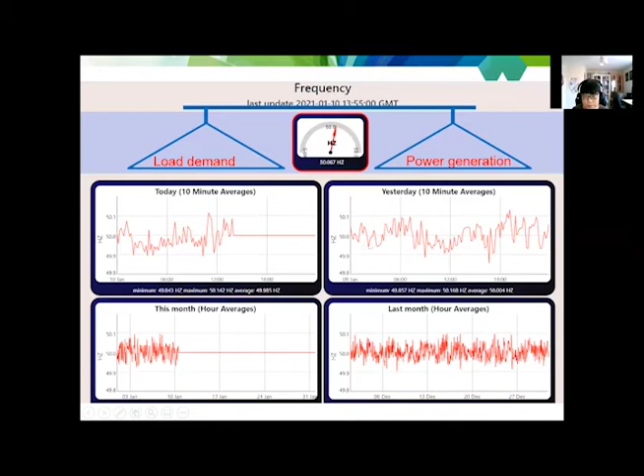Certainly we can see energy storage also starting to play a role in this particular plan. For 7th January this year, that day cost £8.2 million. So it really comes down to cost.

From estimation, around £2 billion is needed just to try to maintain the grid balance. For example, if we forecast the generation and it's away from the real generation, you have to pay a high price to buy peak time generation, to pay a very high value to buy extra generation on board. And if sometimes you generate too much, you have to pay money to the generator to not generate - that's where all the cost comes from.

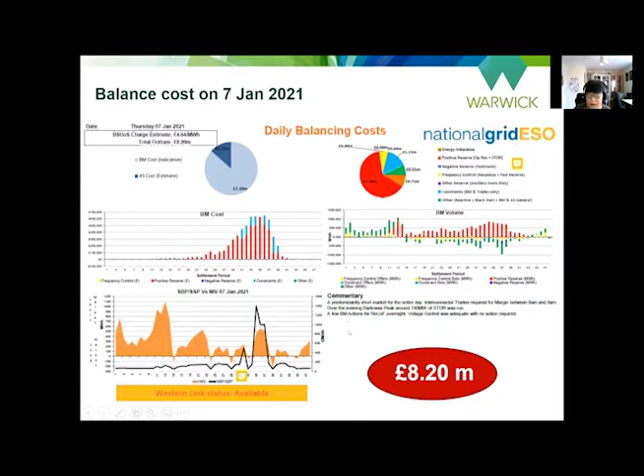This is why in recent years, energy storage has become more and more valuable and is becoming a very hot topic, apart from transportation and portable devices. There's also grid storage in the power sector.

From the power sector's perspective, to balance demand and generation and increase grid flexibility, energy storage plays a role either on the user side, to regulate demand and save money and help with grid balance, or on the generation side, to regulate their generation and try to get closer to the demand side, reducing their cost and also delaying investment on new or enhanced infrastructure.

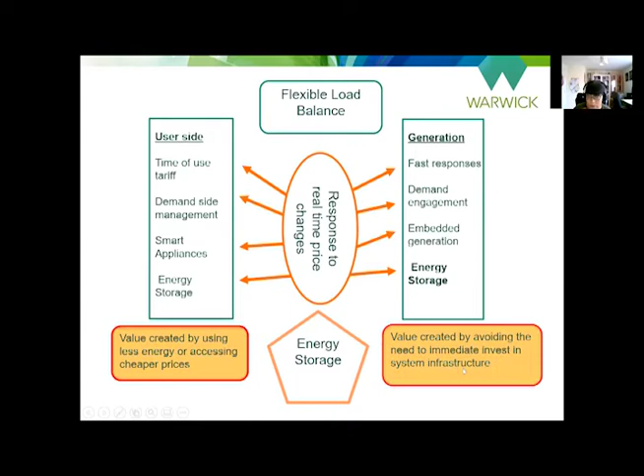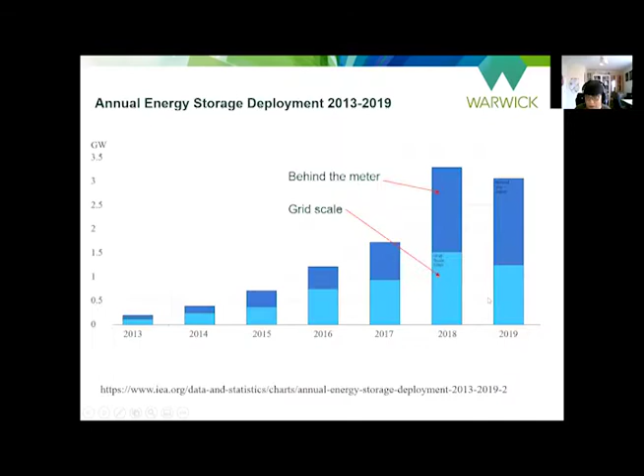There's also an annual increase in energy storage, either on the generation or grid side, and also behind the meter - meaning normally on the distribution or user side. So both sides are growing annually, trying to catch up and get into this market, catching up revenues.

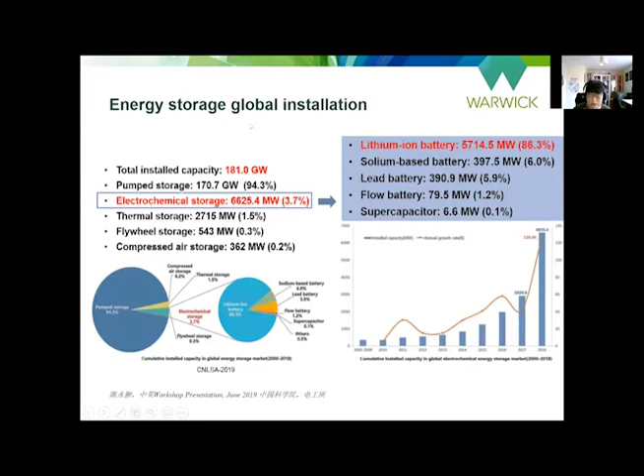Globally, energy storage installation until 2019 has reached a certain amount. Among all installed energy storage for grid service, lithium-ion battery is probably the dominant one - around the world it's dominant, in China it's dominant, and in the UK it's also dominant. We often see news about storage projects just starting, getting funded, or getting investment. Anyway, in the UK and around the world, energy storage installation has increased rapidly.

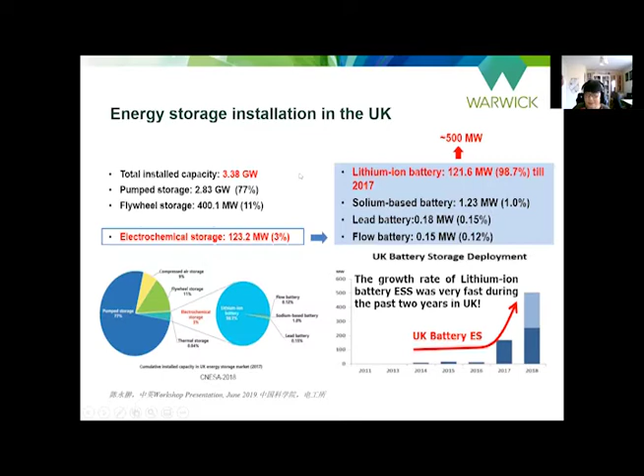But when we look at installations in recent years of energy storage, we can say that most of this, mostly commercial projects, are batteries. So definitely batteries have been the winner in recent years.

However, if we come to the net zero emission target, if renewable energy increases to 50, 60, 70, 80%, then what's going to happen if that's not enough?

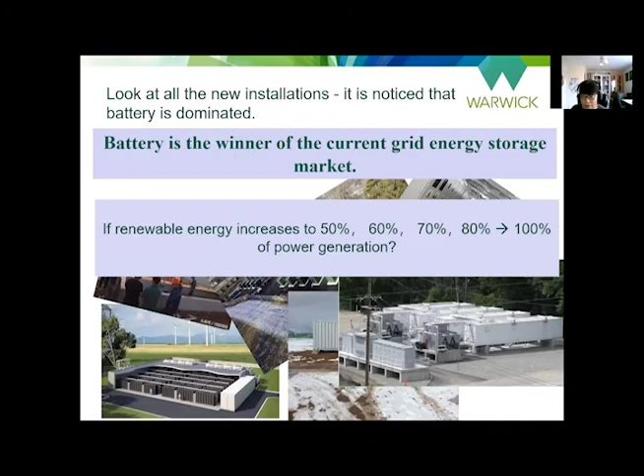It's not just about technology, it's actually about cost. If we look at battery in the energy storage market for grid balance, they really catch up in the high value market for grid balance - for example frequency response is worth quite a lot of money. But if you put into such large capacity, long-term capacity storage, the market value currently is much, much lower than those high frequency ones.

So even if they have the technology and can install massive batteries into such a space, able to store a couple of days or a few days at larger scale to power 50% of a national need, probably the battery wouldn't have the market position like today in the high-end value frequency response sectors. So in that case, we need to look at long-term storage technology.

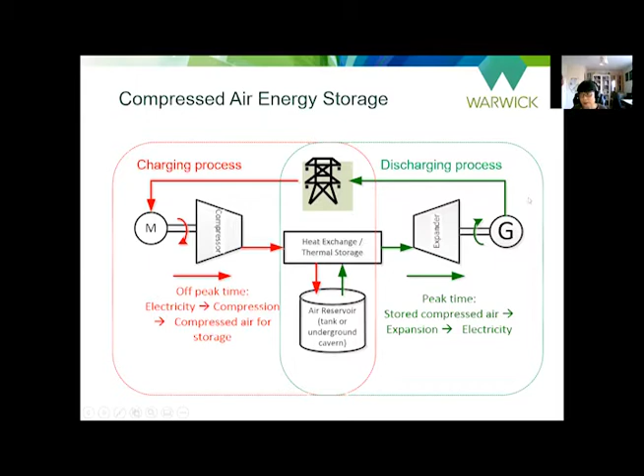The very first one built in the world was in 1978 in Germany - the Huntorf compressed air energy storage. For this particular system, we use a gas turbine burning natural gas to boost the power and give additional energy. Another thing is using the compressed air to increase the power of the gas turbine, but anyway that's mixed. The compressed air is stored in a salt cavern.

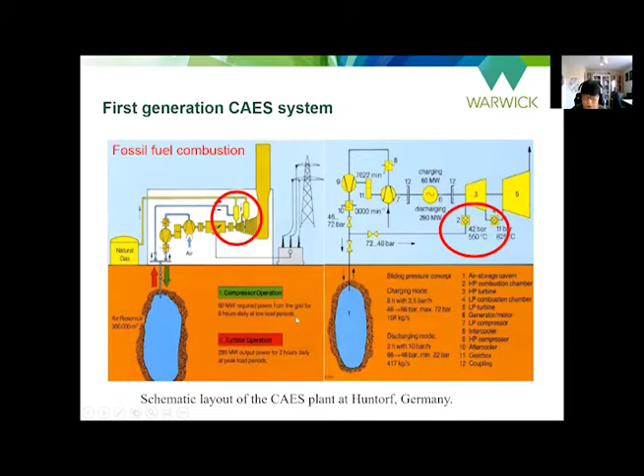We visited this power plant. It was built and commissioned in 1978, and is still in operation, really trying to compensate the power fluctuation from wind generation locally.

The cavern the power plant used was created by some other salt industry, when the engineering salt extraction left this hole underground. So they just cheaply rent this cavern and store compressed air there.

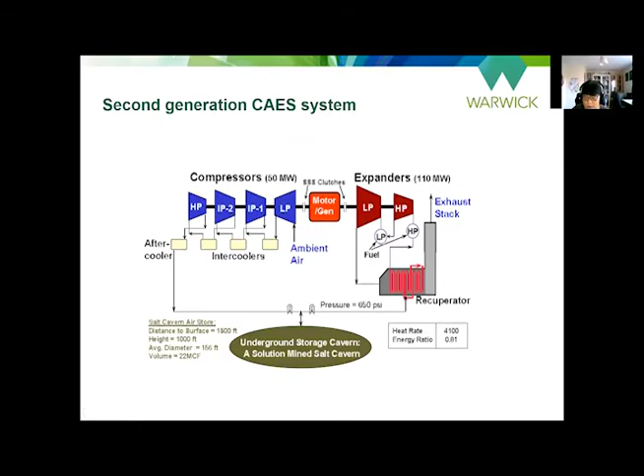The second largest scale compressed air energy storage is the American McIntosh plant. It's something slightly improved from the Huntorf plant - they put in thermal storage to reheat the air, recovering some heat loss, which makes the efficiency slightly higher. That plant, built in 1991, is still in operation.

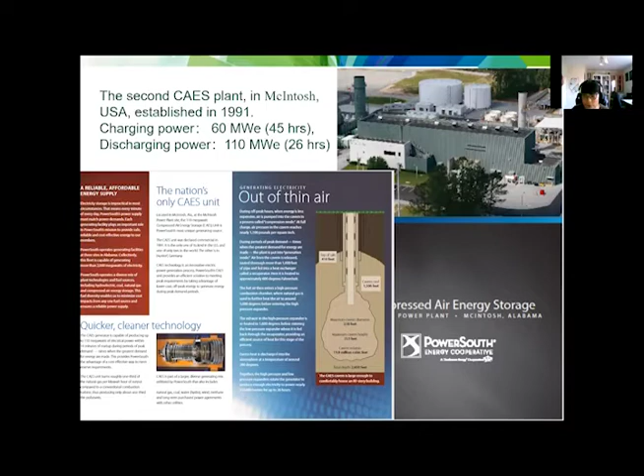Looking at both compressed air energy storage power plants, they have a common feature: they both use fossil fuel. So now the third generation of compressed air storage, current research is really focused on systems that do not use any fossil fuel.

During the compression stage, the heat is captured and stored, and then afterwards reused for generation to boost the power. Compressed air energy storage has been criticized for a long time due to low cycle efficiency for both the Huntorf and McIntosh power plants.

The whole round trip efficiency of the energy stored is probably no more than 46%. So for this new generation to make this technology acceptable in the market, effort has been made trying to improve round trip efficiency. Also, because of the low energy density of compressed air, effort has also been made trying to find how to store larger scale compressed air in a feasible and cost-effective way.

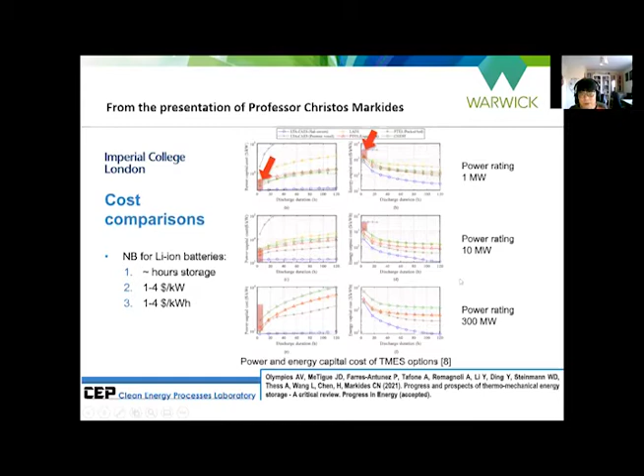However, the UK is very fortunate. Through our study, working with the British Geological Survey, we looked at the whole UK salt deposit and also examined existing caverns currently used to store natural gas. We worked out that if we use 1% of the available salt deposit volume, we can store 100 terawatt hours of energy. Currently the UK uses 300 terawatt hours of electrical energy - so that's almost a third of the current total national usage.

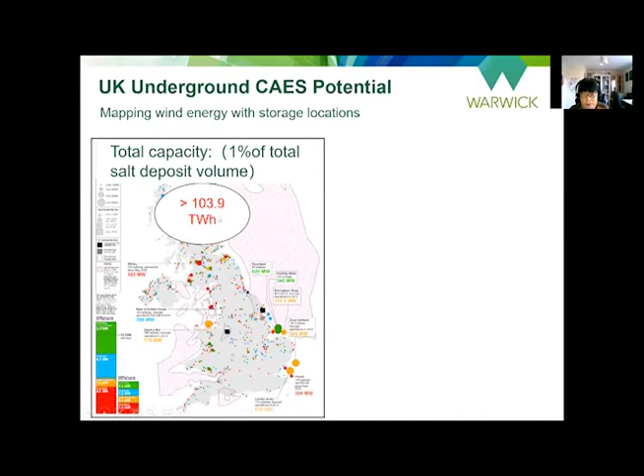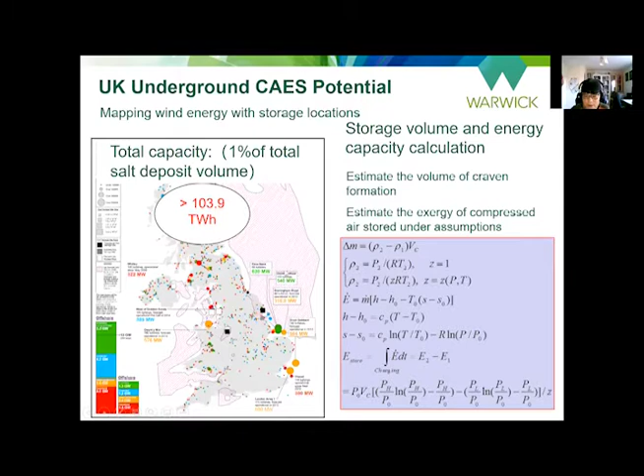With this geological analysis examining the deposits, we developed a software tool. You can simply put the geological condition into it, and based on the modeling behind it, we can do calculations - because when you store air and then try to extract energy, you can't extract 100% of it. Based on all this calculation, we got our conclusions, and all this information became a data file in a GIS, stored in different layers.

Looking at the deposit of salt in the UK, we made a map of the salt deposits and wind generation to see if they have a coincident correlation location. For example, we don't want storage in the south of the UK while generation is in the north. We mapped our salt deposits with onshore and offshore wind generation, and they're probably in very close locations.

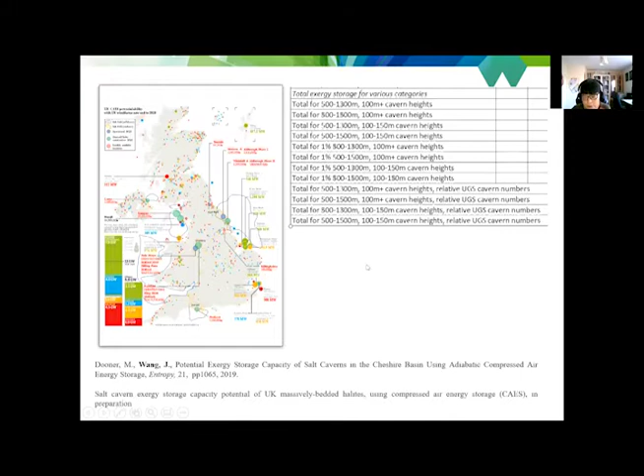For the salt deposit there are different heights, and some heights of deposit you cannot use. So through the whole calculation, we worked out the available, useful, feasible height of the salt deposit, and that's the result.

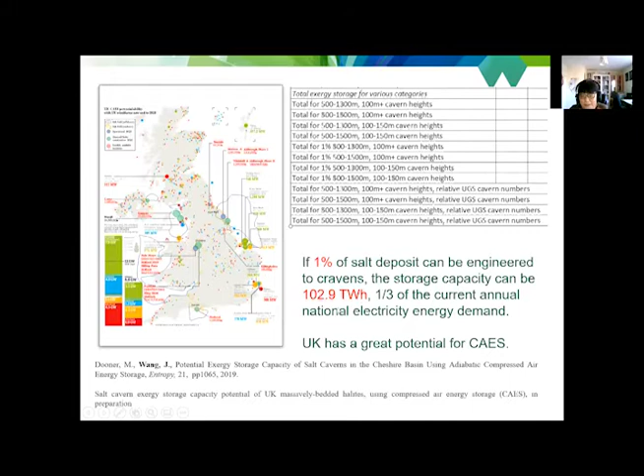From our study, we believe the UK has great capacity and great potential to use compressed air storage for long-term and larger scale storage. To make a salt cavern, you simply drill a hole, put in water to dissolve the salt, extract the dissolved salt water, and form a larger cave. Compared with porous rock storage, engineering this storage volume has a much lower cost. So that's one aspect - through our project we believe the UK has great potential in storage resources.

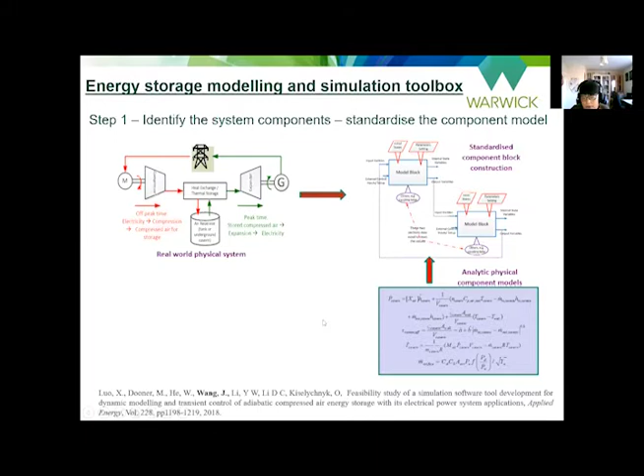In terms of efficiency improvement, we did a system level study. We developed a software tool using MATLAB and Simulink, building a library of all the components of compressed energy storage, put into a standard library to become a simulation tool. When we try to do whole system dynamic analysis, we can simply get the components formulated into the simulation program to do a complete process simulation.

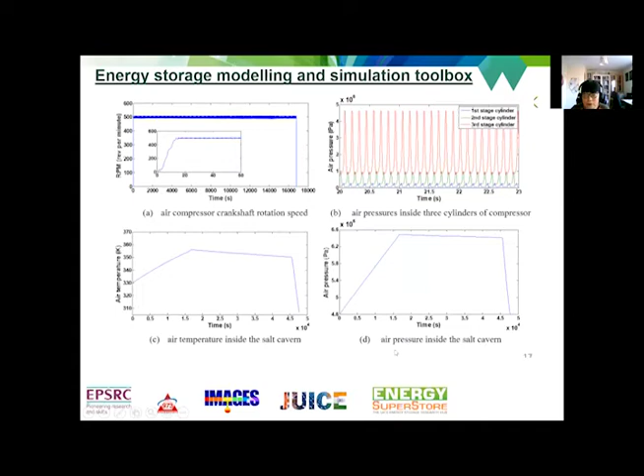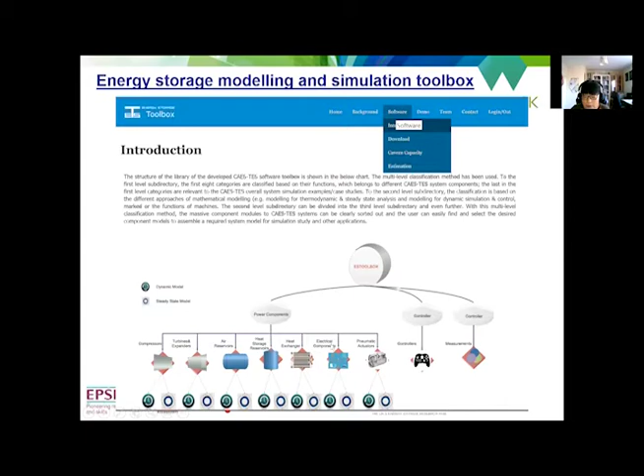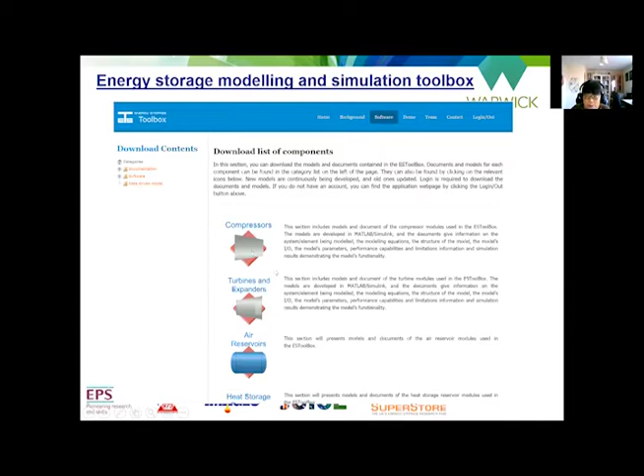This has been put into a website called estoolbox.org. You can log on to the website and find categories of software and tools, then open each one to get the help file and the program. You can also download it as a whole library package, and there's a demonstration video showing how to use this software tool. That's another piece of work we did on compressed energy storage.

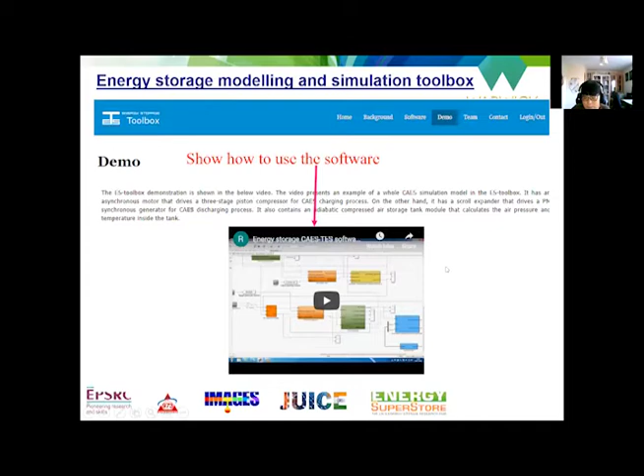With the software we developed, we helped a potential UK project in Northern Ireland calculate storage capacity and verify their results. We also used these tools to participate in a particular 10 megawatt compressed air energy storage demonstration project in China.

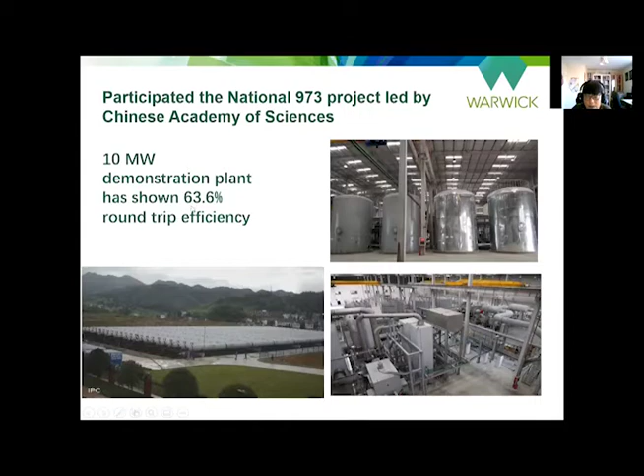That project built an overground storage facility with 10 megawatts and 20 megawatt-hours storage capacity. This is a third-generation adiabatic storage system that stores heat and releases more energy during the generation process. When they started this project, the highest round-trip energy efficiency was 46%. We finished this project two years ago, and the plant has now demonstrated a round-trip efficiency from electricity to electricity of 63.6%. This project is currently generating and connected to the grid.

Another project we visited is in Switzerland, called Alacaes, where they use an abandoned tunnel, sealed, to store compressed air.

It's not very large scale, less than 1 megawatt. And from the report, there is a 72% round trip efficiency. Also from this project, its claim is the lowest capex per kilowatt hour for storage.

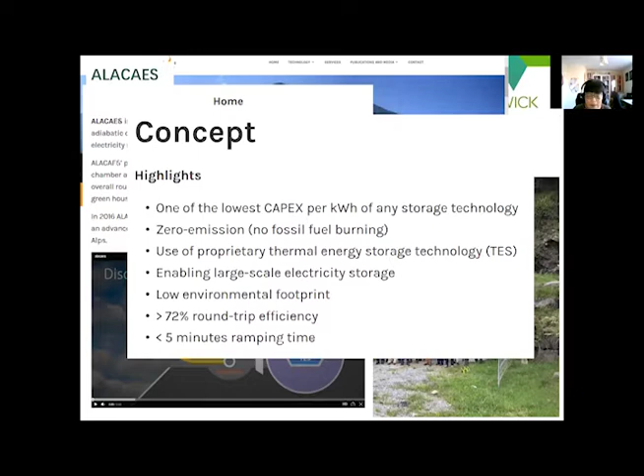So that means for compressed energy storage, there are quite a lot of projects on the way to improve its round trip efficiency and also explore various storage capacities.

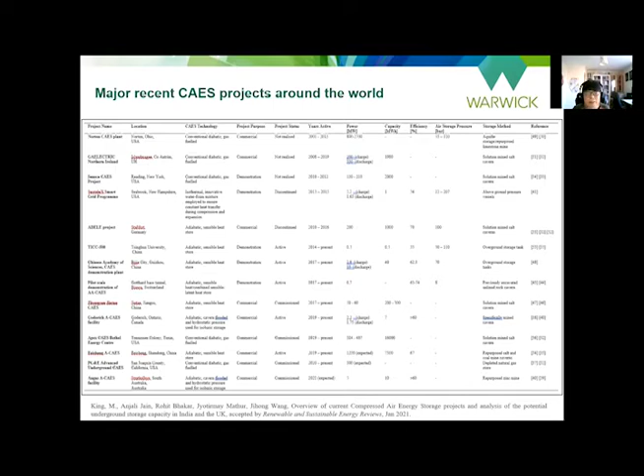Recently they did a kind of survey, and around the world there are around 3.5 gigawatts power capacity of compressed air energy storage demonstration or commercial projects ongoing, and the highest power rating is 100 megawatts. The efficiency aim, through larger scale, is to achieve 69 or over 70%. So that's the current situation about compressed air energy storage development.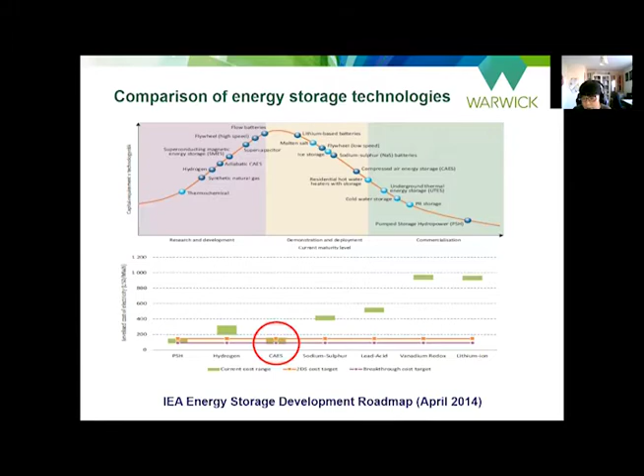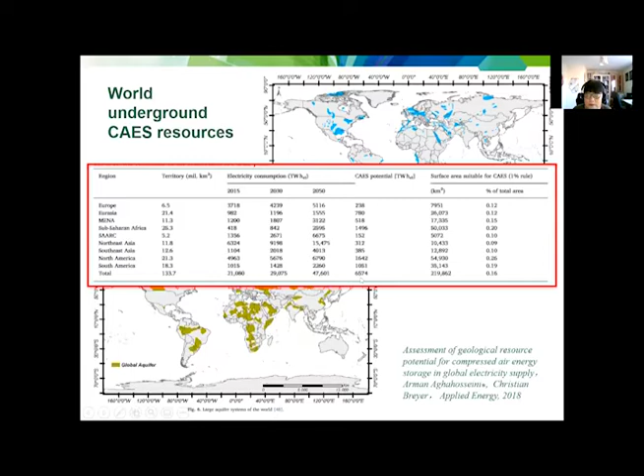Now come to the summary, comparing with larger scale and long-term compressed air energy storage. Even in 2014 it was probably the lowest. Now it still has its cost advantage, a low cost advantage. However, in the world there is also larger storage capacity, over 6,000 terawatt hours storage capacity around the world.

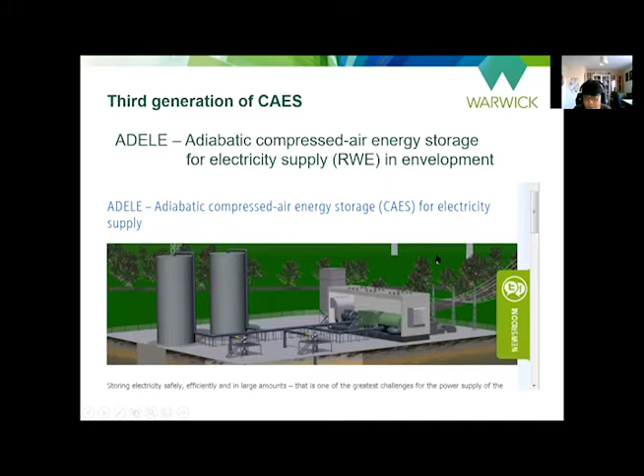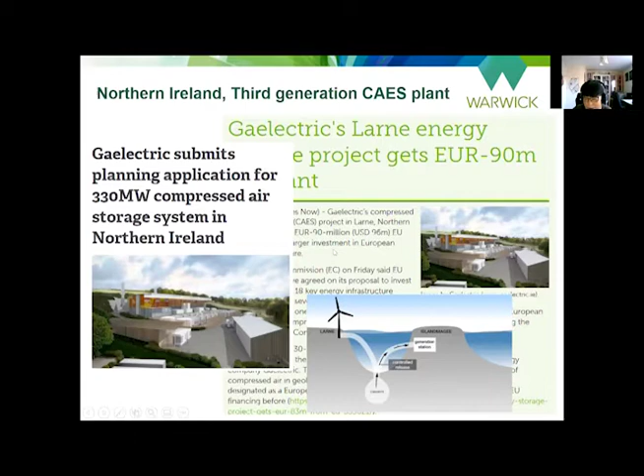However, there are a number of compressed energy storage projects that have been terminated. For example, the RWE Adele project, stopped due to unclear economic viability. And in Northern Ireland, at the very beginning it was really quite promising, but after a few years it was terminated because they passed the public consultation stage about storing air underground in the local area. But the planning permission took a very long time, and the company gave up after spending quite a number, over £1 million, on the project.

So my personal opinion: compressed air energy storage has a low cost, but in the current situation it's quite difficult to attract investment. Why? Because energy storage, the energy type, is in the low value end market, and batteries, because of faster response, are in the high value market.

For example, if you put in 1 unit of battery storage, you can make 10 pounds. But if you put in compressed air energy storage, you probably can only make 1 pound revenue out of that 10 pounds. So that means it takes a long time to get your investment back. Also, compared with batteries, it still has lower efficiencies.

And batteries can be any scale, small or large. So if you invest at small scale, you have lower risk. But in the case of compressed air storage, it only makes sense at a larger scale. So that means a large investment, but it takes a long time to get the money back.

Two years ago I worked with a company trying to invest. The company got money and tried to build a 30 megawatt compressed air energy storage project in the UK. Even though I don't understand finance that much, I saw the financial analysis sheets from the company, and after a long time they gave up, because based on the current electricity market, they probably would only start seeing their money back, and start trying to recover their cost, after 15 years. That's why I have to stop.

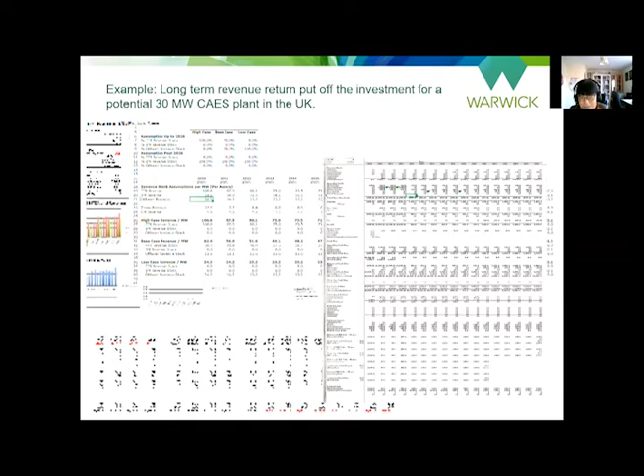I think there's one more minute now. Yes, I've finished. Okay, cool.

Just to say, the technology itself is one aspect. Market and application probably wouldn't allow all the good technology to have their position.

Brilliant, thank you very much. That was really interesting. I particularly liked the MATLAB library. That looks really interesting, I might have to go and check that out.

Can anyone put a question? Okay, someone's already put a question in the chat: with our existing and future salt cavern capacity and R&D activity in adiabatic CAES, is the UK in a position to demonstrate this? And if so, what is the next step?

The UK did have such kind of initiatives about five or seven years ago, when Gaelectric started trying to put a compressed energy storage project in Northern Ireland near Belfast. Initially the project went so well, and there were quite a lot of investors watching the project, probably wanting to buy it if it got permission or to invest in it. But the whole process took a very, very long time, and in the end it stopped.

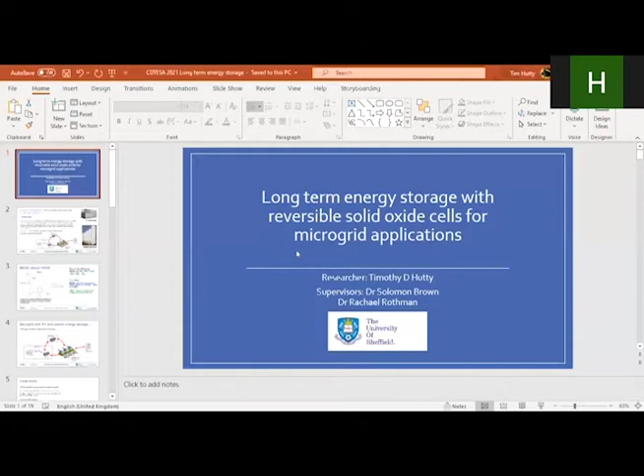So first thing I should say is that I am in fact University of Sheffield principally, which is a mistake I maybe should have corrected on the conference program. But yes, I belong to the Energy Storage CDT here at Sheffield.

And the title for this talk is Long-Term Energy Storage with Reversible Solid Oxide Cells for Microgrid Applications. And I'll just unpack that slightly.

So what I'm going to be talking about is some work I've done using both simulation and optimization approaches. And it's especially about comparing the merits of long-term energy storage, similar to what we've just heard about in terms of CAES, with short-term battery storage. But here we're talking about hydrogen energy storage.

And the technology in particular that we're considering is these RSOCs. Now they differ from other electrolyzers and fuel cells in a few important ways. They are particularly efficient, they operate at high temperature, and they can realize both operations of power-to-gas and gas-to-power with a single device. On the other hand, they are quite an immature technology.

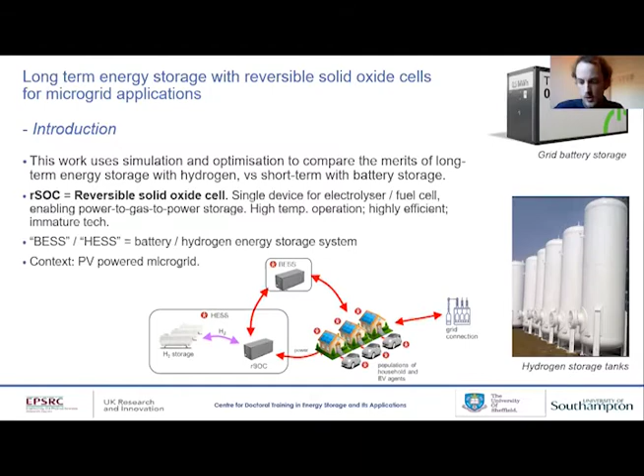Now, I'm not actually going to be dwelling particularly on the details of the RSOCs for this talk. This talk is mainly just about weighing up the relative merits of short-term versus long-term energy storage. And the context we're doing this within is a microgrid type setup.

So we're looking at a group of houses with embedded generation, which is solar in this case, grid coupled, and sharing energy storage, which can be battery storage or hydrogen storage, or both.

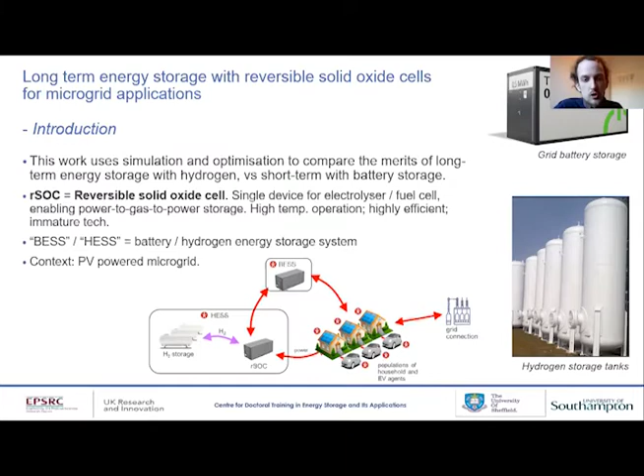So in hydrogen storage, you have a cheap cost per kilowatt hour, so a cheap cost per unit energy, but a much higher cost per unit power. Whereas with battery storage, or lithium ion battery storage in particular, you have a sort of middle of the road cost for both. So hydrogen storage again gives you the opportunity to buy that bulk long-term storage for cheap.

So the question is, how do those weigh up, those cost benefits and expenses? The other contrasting aspect, just talking big picture, I guess.

Again, most people will know storage with hydrogen has a low round trip efficiency. With RSOCs, around about 35% power-to-power has been demonstrated. As I say, they are supposed to be more efficient than other electrolyzers, and there is the prospect that we should see 70% sometime in the future, which will be quite a big leap.

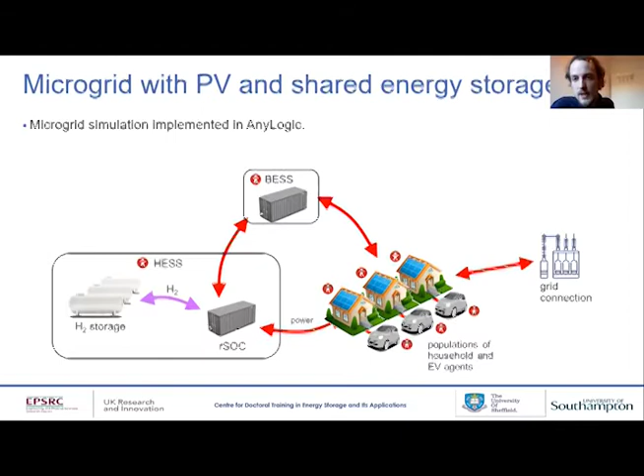Specifically, what we've modeled with this: we've chosen a Southeast England location, demand data from UK power networks, some irradiance data from UK ECN, and 100 households. You can see here the basic vital statistics, about 4 megawatt hours per house, basic electricity demand, and so on.

I should say the electric vehicles are modeled. It's actually a similar model to, and indeed borrows from, the one used by Rachel Lee who presented earlier in the day. That is based on the UK National Travel Survey, and the trips they take and the amount of charge that they need stems from that.

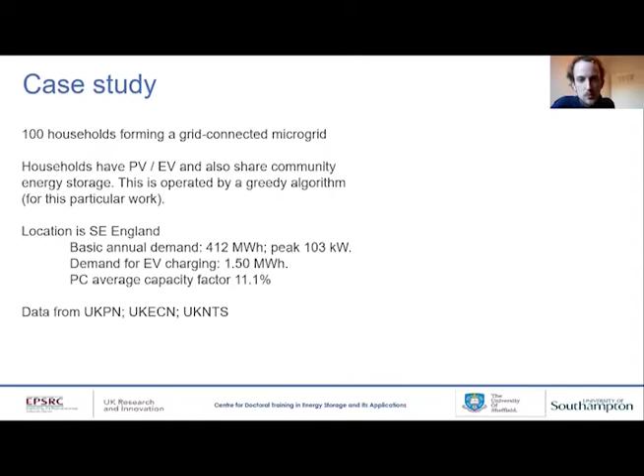So just an example of the sort of load and generation we get in this case study. The plot above is for a week and below is for a year. We can see we have a mismatch generation to supply, both on a diurnal scale within a day, and certainly also across a year, summer and winter.

And so that is what we're trying to address with our energy storage. The application we're pursuing is very much energy shifting, if you like, trying to increase the reliance on the renewables on our microgrid by shifting generation to where it's needed.

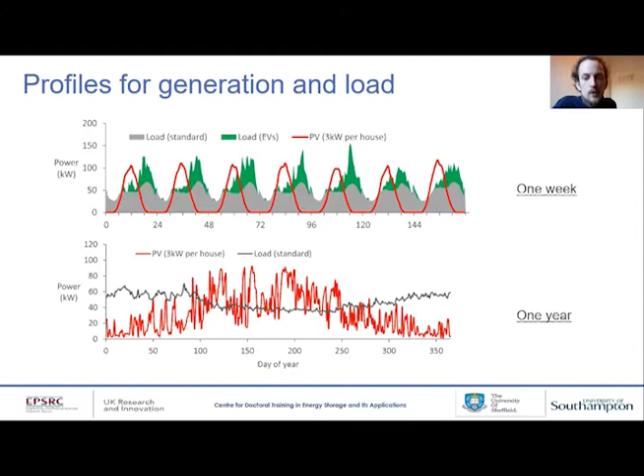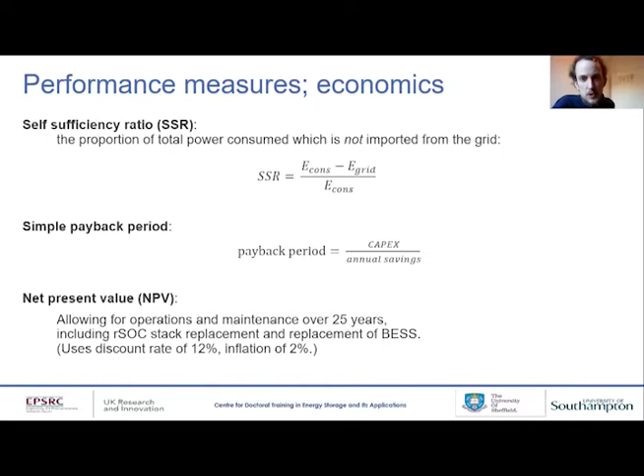So these are the performance measures that we generate from our simulation, and none of it is rocket science. The self-sufficiency ratio is just the proportion of power which is procured locally within the microgrid rather than imported. Simple payback period is just the estimated capex for the microgrid and all its components divided by the annual savings. And for a more detailed assessment of the finances, we also calculate a net present value with various assumptions. I'm not presenting the capex assumptions here, but if anyone wants to ask about them, we can look at them after.

So what we've done is essentially plugged this simulation into a multi-objective optimization. That is essentially weighing up the SSR, which we're using as a crude measure of environmental benefit, in that it should correlate to emissions curtailment, against the economic considerations of simple payback time and/or NPV. So we find that the more SSR we want to obtain, the worse the economics will get.

We optimize with choice of technology, in particular whether we want to install the battery, whether we want to install hydrogen, or both. We also size those components both in terms of power in kilowatts and energy in kilowatt hours, or kilograms for hydrogen, against the objectives of SSR or the economic ones.

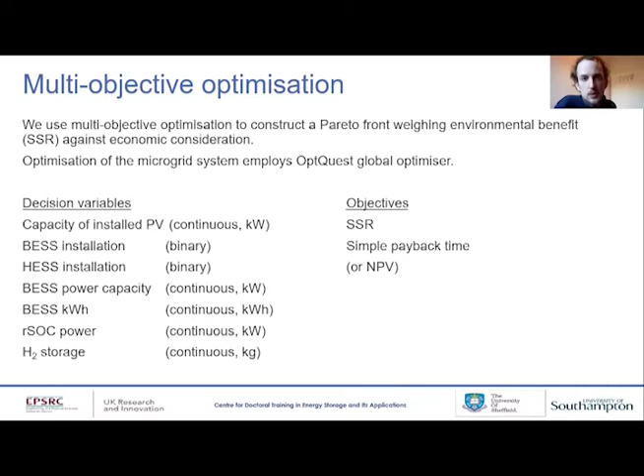So let's move on and see how that playoff turns out between the SSR and the finance, and in particular, under what circumstances the hydrogen storage is actually selected. That's what I'm really interested in here: where is the long-term storage the optimal selection versus just the battery storage?

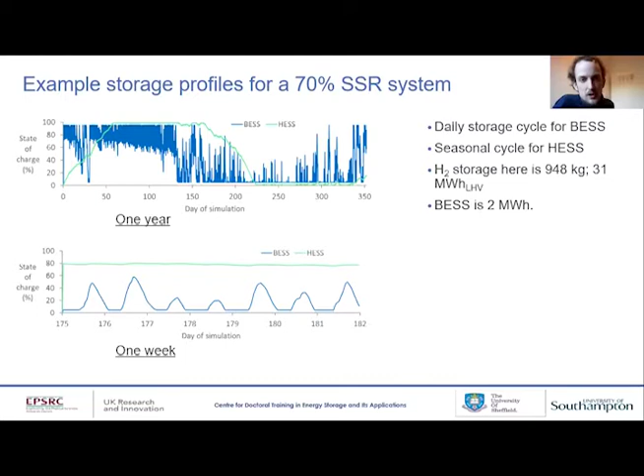So straight away we can say that the finances are not looking good for a setup like this, with the net present value invariably negative. The simple payback period definitely tends to be above the sort of lifetime you might expect from microgrid components.

What's interesting, I think, is that whilst battery storage is always selected by the optimization for this range of SSR that we've considered, so 50% upwards, the hydrogen storage kicks in at about 60% SSR. Above that SSR, the hydrogen storage is always part of the cheapest system to obtain such SSR.

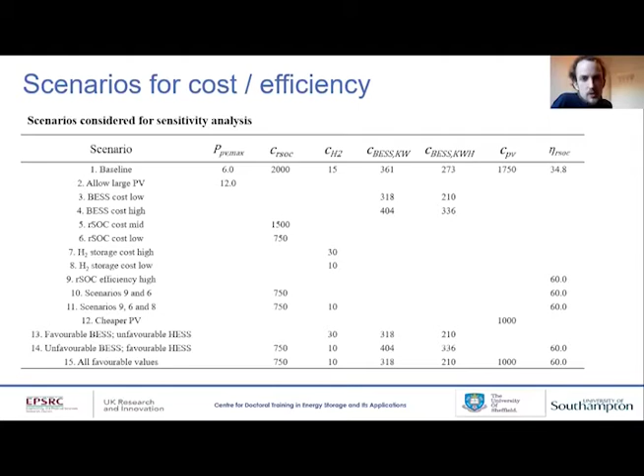Apologies for shoving a massive table in your face. The obvious question is, how does that conclusion about needing hydrogen storage above 60% SSR vary if we change our assumptions around? I've actually explored 15 scenarios in total here, trying out the different bounds for the range of costs and efficiencies that we can expect. There's no time to go into these in detail, and indeed I would suggest we don't really need to.

The key point here is that for this particular microgrid, that threshold turns out to be very insensitive to any of these assumptions. It stays around about 60% regardless of the efficiency of your RSOC or the costing of the different storage technologies.

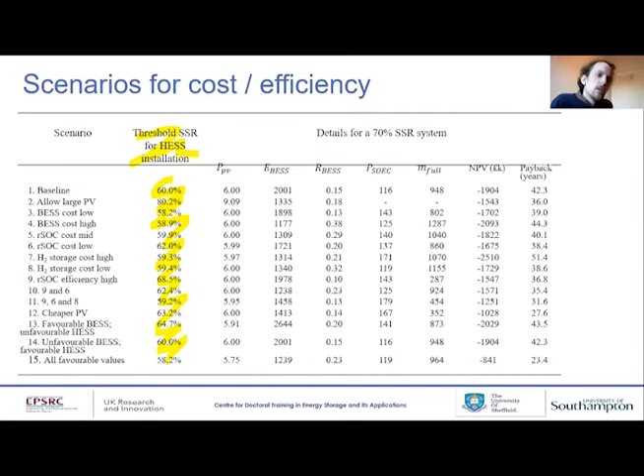The things that do alter it are firstly the allowable capacity of PV that you can install. That makes a massive difference, and somewhat a higher efficiency RSOC maybe, but the PV in particular.

So, yeah, it definitely seems that oversizing of PV generation is a rival solution for obtaining high self-sufficiency across the year.

So your long-term hydrogen energy storage - it's often more favorable just to oversize your generation if that's possible.

So a natural thing then to do is to run the multi-objective optimization again and explore the Pareto fronts in more dimensions. Here we've looked at SSR, payback period, and PV capacity to construct a Pareto front in 3 dimensions.

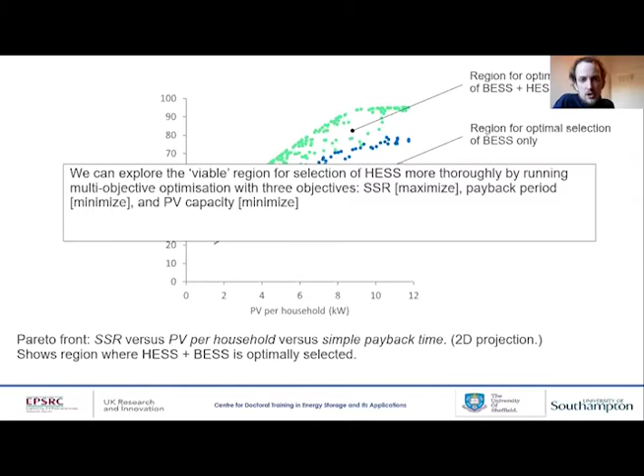And what we end up with is this. This is a projection onto the plane of SSR versus PV capacity. So we've now got certain regions where the hydrogen storage is preferred, or the battery storage by itself is preferred.

Note the grey line at the bottom just shows how much self-sufficiency you get with no energy storage whatsoever. So there's certainly a large region of PV capacity versus SSR where the battery storage by itself is the best way to go.

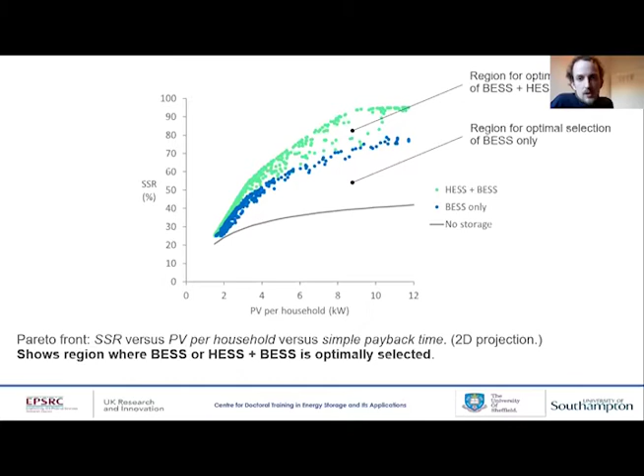But yeah, for any given PV capacity, there comes an SSR threshold where you need your long-term storage to get further. Which is about as far as this work has got so far.

So, conclusions. Yes, the long-term energy storage is useful if you're looking to obtain really high grid independence and the accompanying environmental benefit.

The economics are not good. They're not good even for the battery storage, the solar and battery microgrid. They're certainly not good for the hydrogen microgrid. Notwithstanding, the hydrogen storage can be the cheapest way to do what you want to do.

And I think a key point is that oversizing your PV generation does seem to be the strongest competitor to using the long-term storage for a system like this.

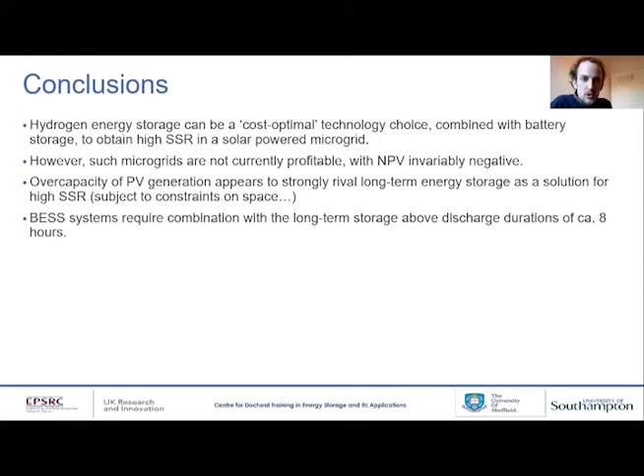Various things we still want to do with this work. It's very much a project in progress, I think. Can we get more value from our hydrogen energy storage by doing other things with it? Rather than just energy shifting, can we peak shave?

And especially, and this is a very key thing that we're going to bring in, what can we do with waste heat from the RSOC? Can we supply that to the houses? Will that make it more economical, more useful?

And another aspect we want to work on is what can we do with these EVs? If we start using the EV batteries for short-term energy storage, would that make the community battery redundant? If not, how can the EVs work with the community energy storage?

All right, I think I've run a bit over, but thanks for listening. No, that was fine. Questions?

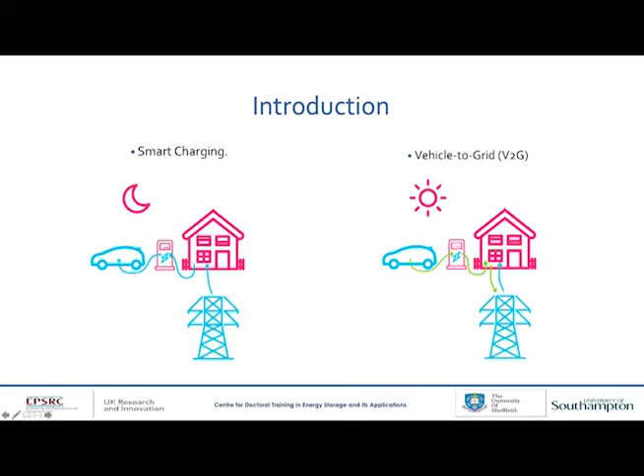On a small scale, one application is vehicle to home, which is kind of the same as V2G, but in this case the energy goes straight to the household to reduce the energy demand. This can lead to reduced electricity bills for each consumer, which is going to be the focus of this work.

With all these technologies, we can consider an EV as a type of energy storage system, probably more like a mobile battery for a household. However, in order to take full advantage of these technologies, the EV must be plugged into a bidirectional charger, and the vehicle usage of each consumer can impact the availability of the EV, which can impact the provision of V2G and V2H services.

So for this work, we ask two main questions: can we forecast the availability of EVs to provide V2H services? And how effectively can V2H services be provided as the EV availability changes?

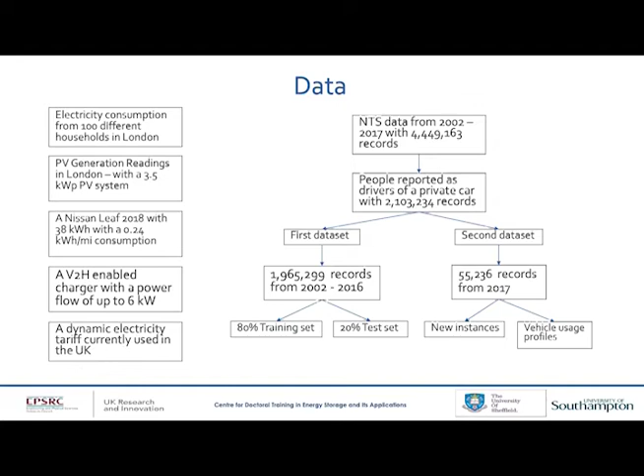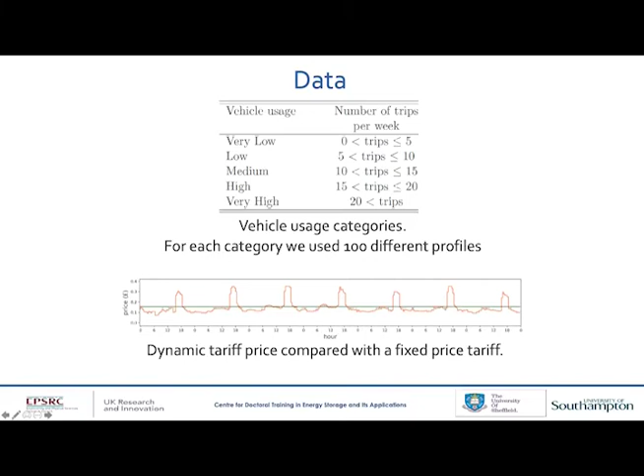So the vehicle usage categories, we divided into 5: very low usage, low, medium, high, and very high. You can see how we split them. We use 100 profiles per category. At the bottom, you can see an example of the dynamic tariff that we use compared with a fixed price tariff.

For the machine learning model, we divided the model into 3 parts. The first part is a classification problem to predict the start location. The second part is a classification problem again, to predict the end location. And the third part is a regression problem to predict the total distance, in order to calculate the energy consumed by the EV.

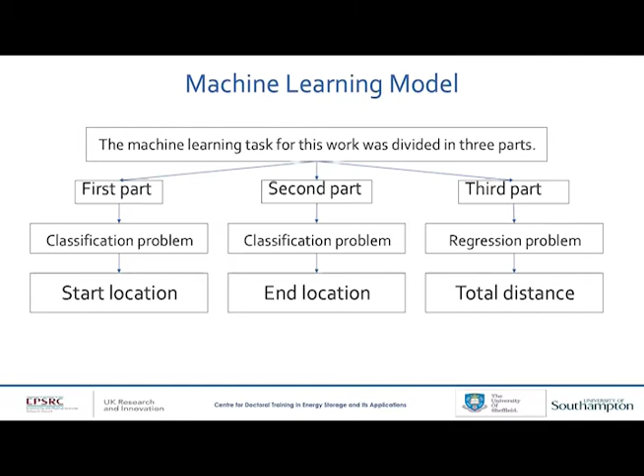So once the vehicle availability has been predicted, the charging strategy for the EV was optimized. Here are the results.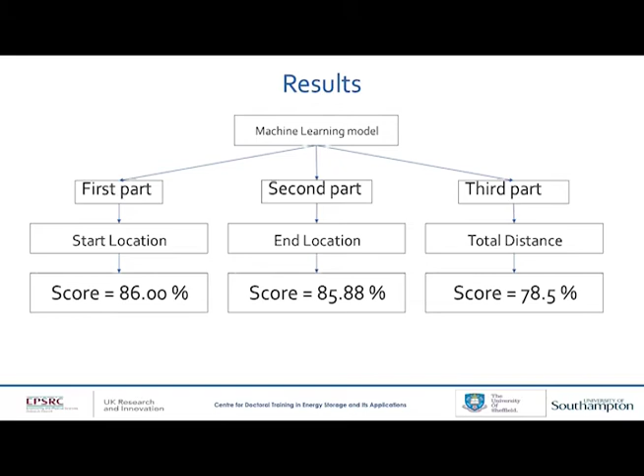For the negative, that's when the EV is giving energy to the house or consuming energy for travel.

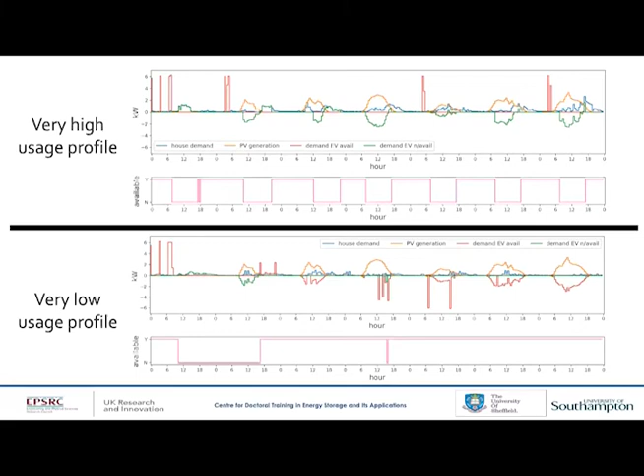For example, the person arrives at the shop or wherever and stops using it, so it stays flat for a couple of hours until it gets plugged in again at the household and starts charging.

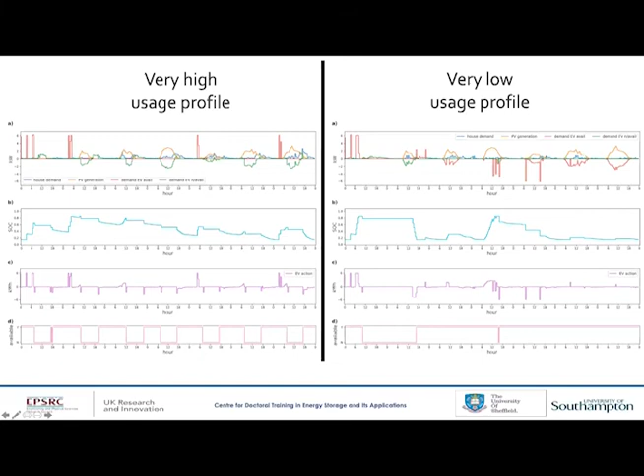This is the full data that we got. At the top, house demand, PV generation, demand, and when the EV is available versus not available. The second plot is the SOC. The third plot is the EV action, whether it's charging or discharging accordingly. And at the bottom, as a reference, the availability profile for each one of these users.

This is just the general results that we got. I'm going to explain them in the conclusion.

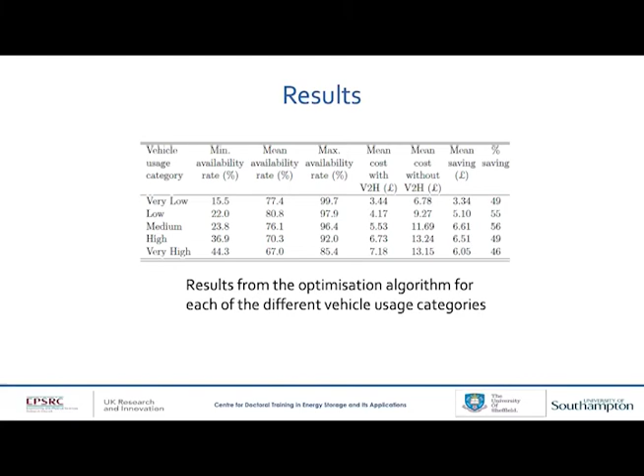Oh boy, okay, did my slide change? No, it doesn't seem to be responding to you. Oh boy, okay, just give me a second. Oh, there you go, I think it just changed. Yep, that's fine. Five minutes, all right by the way. Okay, excellent.

So the conclusion for this work: as you might already imagine, the less an EV is used for traveling, the greater its availability to participate in V2H services.

All the categories of EV users benefited from reduced power bills when deploying V2H services, of course.

There is an electricity cost reduction of at least 46% on average when V2H services are provided. Of course, this is only with the dynamic tariff, we didn't use any other.

And most importantly, this is regardless of the level of vehicle usage. So it doesn't matter if you just use it once in a while, going to the shop or whatever activity you want, or if you are commuting every day and have a very active life—well, probably not now because of the lockdown, but okay.

Even the most frequently used EVs were available to provide V2H services at least 60% of the time on average. This means that regardless of how much you use your EV, you have a very high chance to benefit from this technology and reduce your electricity bill.

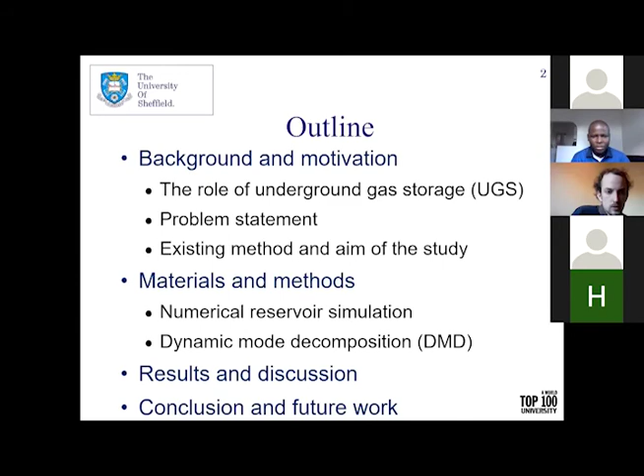Background and motivation: the role of underground natural gas storage. One role of this type of facility is meeting seasonal consumption. It requires sufficient time to explore, produce, and transport natural gas, and most of the time the produced quantity is not needed when it arrives at its destination. So to preserve that excess quantity, it has to be stored via injection into underground storage facilities, and during a time of raised demand, especially in winter, this type of facility ensures that the raised demand is met, providing security against unanticipated energy supply interruptions.

Another benefit is that this type of storage also provides larger and safer storage. Other previous speakers have stated some points on this. These underground formations accommodate natural gas at high pressure, which makes them larger storage facilities and a bit safer compared to storing such products on the surface.

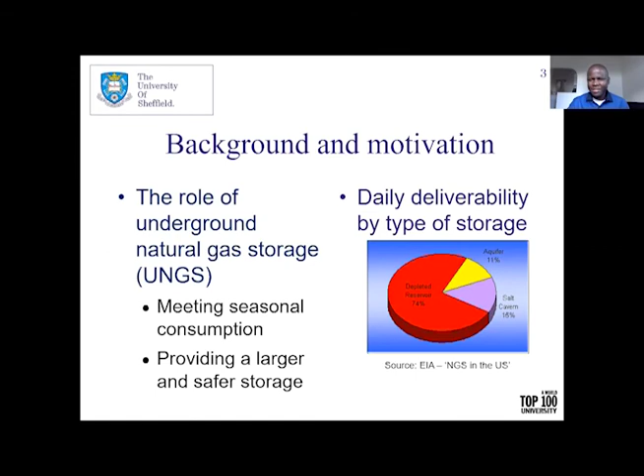Now, the problem we are looking at is the challenge of learning pressure dynamics or pressure variations during natural gas storage or injection in subsurface storage. Existing methods entail working with complex and cumbersome algorithms and carrying out numerous simulations, which is time consuming and also difficult to maintain or upgrade.

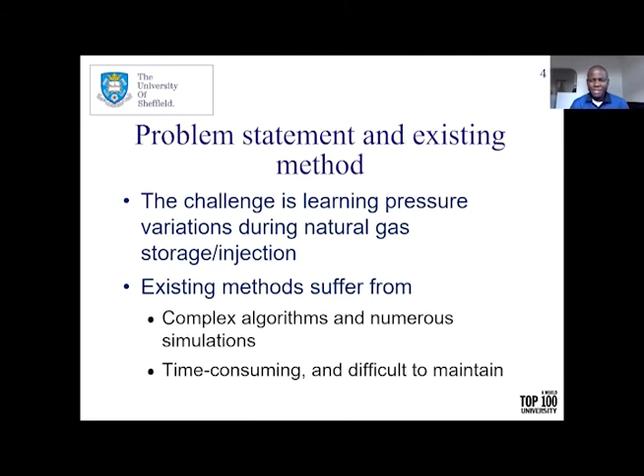So the aim of this work is to develop a data-driven model that learns and reproduces the pressure dynamics of an underground storage reservoir model as natural gas is being stored or injected into the reservoir.

Materials and methods: first, we look at simulating a reservoir model numerically. We consider a reservoir model adopted and modified from the first Society of Petroleum Engineers (SPE) comparative solution project. We set up a reservoir model with an injection well and production well. It is a three-dimensional, three-layer reservoir model with the injection well completed in the first layer and a production well completed in the third layer.

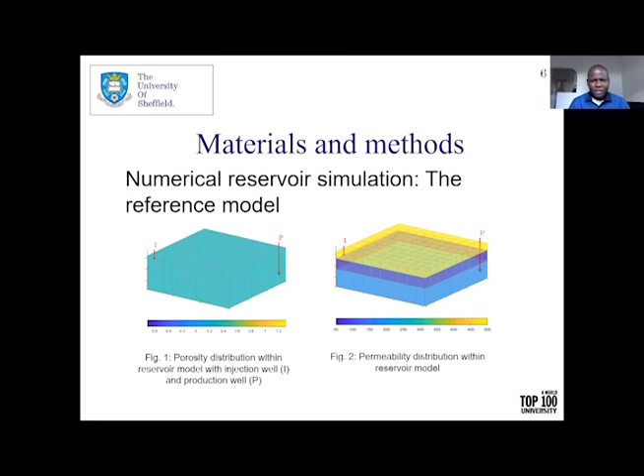Now for the data-driven approach: having simulated the reservoir numerically and generated the data, the pressure field data were retrieved and arranged into two matrices, Y and Y prime, which are snapshot matrices. Dynamic mode decomposition, or DMD, attempts to construct a linear dynamical system having Y at time t to approximate Y at time t plus 1. Here we have a matrix A, which serves as a least square fit solution for the approximation. The major task is to solve for this matrix that will give approximations of this pressure field data at time t plus 1.

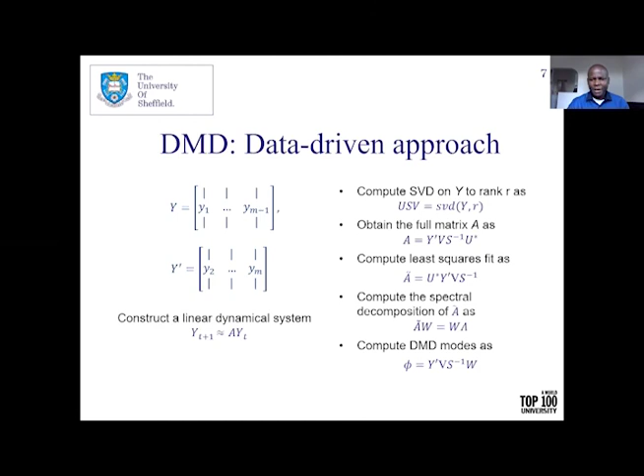So, results and discussion. First, we look at the numerical simulation of the reservoir model that was set up, and after performing the simulation for 1,200 days, we observe how the pressure evolves within the reservoir model.

Initially we have 330 bar within the reservoir as initial pressure. As natural gas is being injected within the formation, the pressure keeps rising, and at the end of the simulation period, the pressure rose to about more than 480 bar. That happens as the formation accommodates the injected natural gas, making it a kind of pressurized container.

It is also worth mentioning that the production well is closed. We just want to observe what happens as the formation accommodates the injected natural gas.

Also, to get an insight of what is happening within the grid cells, we plot some snapshots of selected days from the time the simulation commences: day 1, day 65, day 190, and after 425 days, which gives us an idea of the pressure evolution within the pore grid cells, or within the reservoir formation.

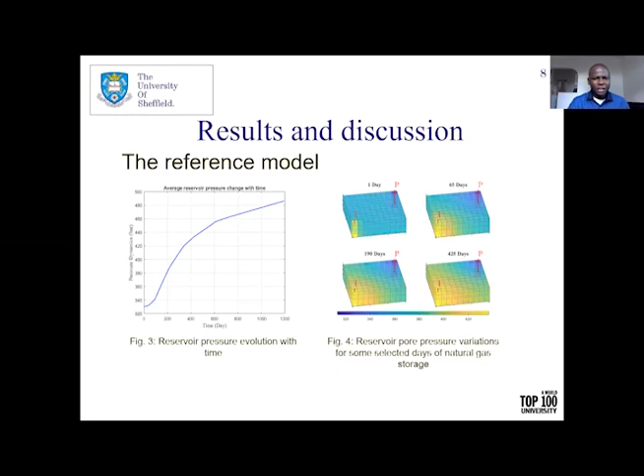Next slide please. Now we apply the DMD algorithm on the pressure field data, following all the steps mentioned previously, and compare the results of the DMD with the reference data.

That is what we obtain in this first figure. We have a very good match, and DMD was able to reproduce the pressure field, or the pressure dynamics, of the simulation as natural gas is being injected. Not only reproducing, but DMD can predict one time step ahead. It is also worth mentioning here how the number of eigenvectors retained affects the reconstruction of the pressure field data.

In this case, 15 eigenvectors were used to reconstruct the pressure field matrices or data.

The other side is the pore pressure variations. We compare the DMD outputs with the reference data for the selected days shown previously in figure 4. DMD also shows good agreement in capturing the pore pressure variations as natural gas is being injected within the formation over time.

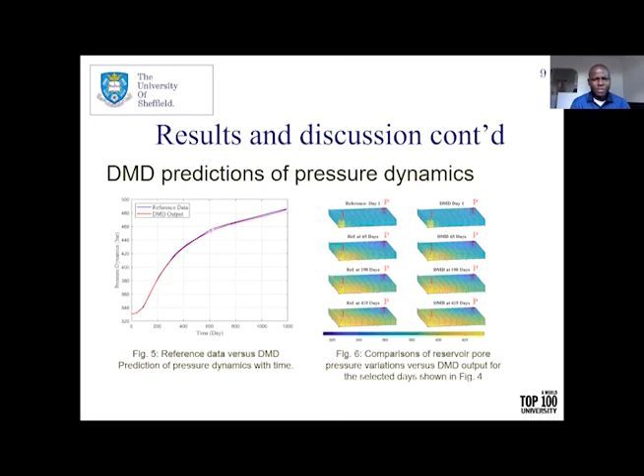Next slide please, 5 minutes. So this is what we have for now.

In conclusion, a data-driven method that learns and reconstructs the pressure field of a depleted reservoir model, mimicking the storage of natural gas in a subsurface formation, is proposed. Based on results, we have shown that the method is able to approximate the reservoir pressure change over time with a root mean square error of 2.9886 and R-squared, or coefficient of determination, of 0.9996.

As part of our future work, we are experimenting with different types of rock properties, changing the porosity and permeability, to see how it affects the results. We are also considering, after storing the natural gas, opening the production well to see how the pressure behaves as the reservoir produces the injected gas, and also to see how DMD will do in learning the pressure dynamics when the system produces.

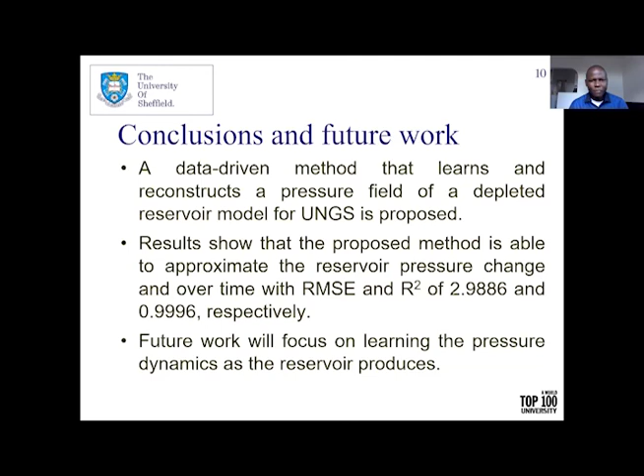Thank you very much, very interesting. Does anybody have any questions? If so, please put them in the chat. If not, we might just jump straight to the break, as we're 2 minutes over, and I don't want people to get angry that I've not had a chance to get their coffee. Any questions? No? Well, if you keep an eye on the chat, Aliuda, and if anyone has a question, I'm sure you can respond to them directly. But thank you very much for that.

I will, thank you. And thank you everyone who's presented in this session. Some really good presentations there, really interesting stuff. If we reconvene in 7 minutes at 20 to 3.